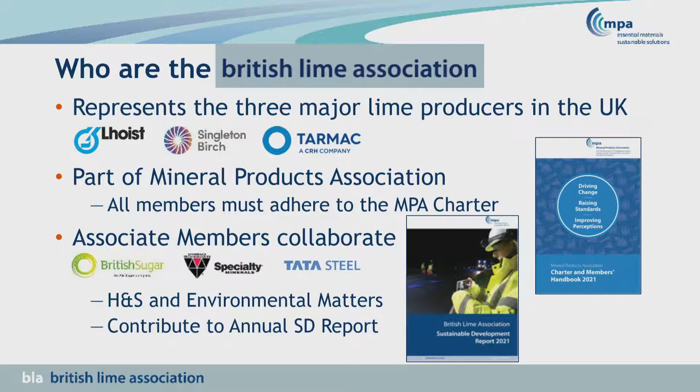So UK lime plants - we all know that Buxton is clearly a big centre for lime production, because that's where the really good calcium carbonate is. But we also have Singleton Birch based over in the Humber area. And then Lhoist have a dolomitic lime production plant at Whitwell in Nottinghamshire. Dolomitic lime is produced in a slightly different way you may not be familiar with - it's produced in a very similar way to cement, going through a rotary kiln at a higher temperature.

And then Tata Steel have their own production facility at Shap Fell, so anybody who goes up and down the M6 regularly will have seen it. As you come over the top of the hill, if you're going up it's on your left, if you're coming down it's on your right - a load of kilns on the side, you'll know it if you've seen it at Shap Fell. Specialty Minerals are at Birmingham, and British Sugar are producing where the sugar beet comes from.

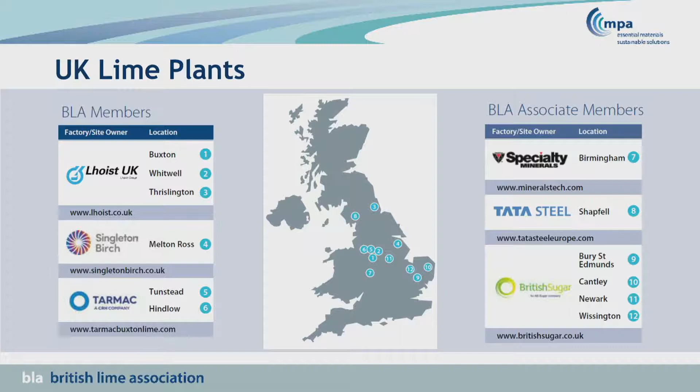So that's manufacturing. Lime is really, really important. All the UK lime producers continued producing lime throughout the COVID pandemic because we have to have lime for societal purposes. It's important because it purifies drinking water, treats your wastewater, cleans up your sewage sludge. It cleans out emissions from combustion plants, energy from waste, and other incineration processes, which clearly there was a lot more of going on during the pandemic.

And it's also used, as I've noted, in primary materials, foods, chemicals, plastics. So maintaining a continuous supply is really, really important for the UK.

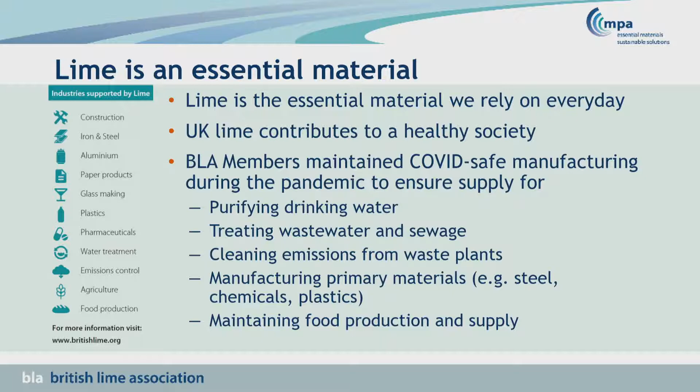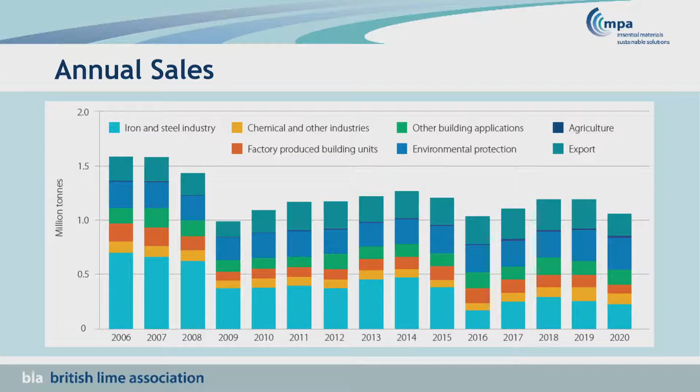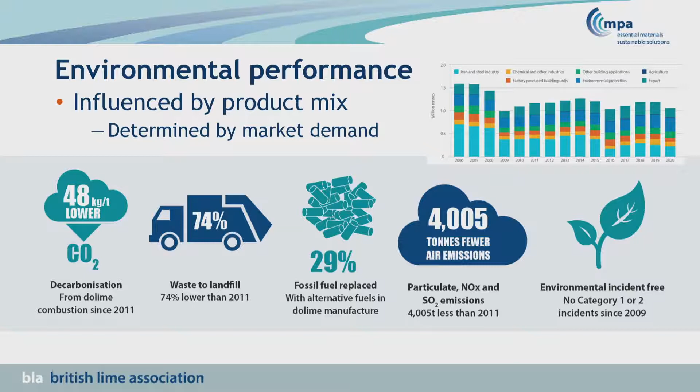In terms of collaboration on health and safety, we collaborate to try and achieve zero harm. I don't think that's a shock to anybody. And we've got some really positive environmental performance. We report on this every year, I'll let you get the SD report.

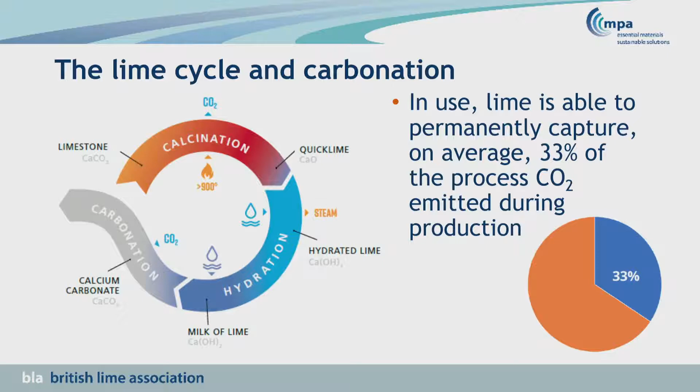This is the note I want you to make a mental note of, David's already mentioned it, I'll come back to this later. Recent studies have shown lime captures that 33% of the process emissions produced to produce lime. When you produce lime, you inevitably drive off carbon dioxide - those are your process emissions. It doesn't matter how you heat it, you're going to get the carbon dioxide driven off. But in use, because we have such a diverse array of uses, 33% of that gets reabsorbed. As soon as you put it in water for water treatment, you get 100% carbonation of that particular product in that particular use. But overall, it's 33% based on the markets the materials go into.

Lime and stabilisation. Basically, there are three mechanisms at work when we stabilise with lime. First is improvement. If you add lime to a moisture-bearing soil, you get this exothermic reaction - lime and water heats up, essentially.

According to my maths, for every kilo of calcium oxide you heat up, you get around enough energy to boil 6 kettles, so that's quite a lot. That heat dries the soil, and it also reduces the moisture because the calcium oxide is combining with the water to make the hydrate. So you're getting two actions going on there to help you dry out your soil.

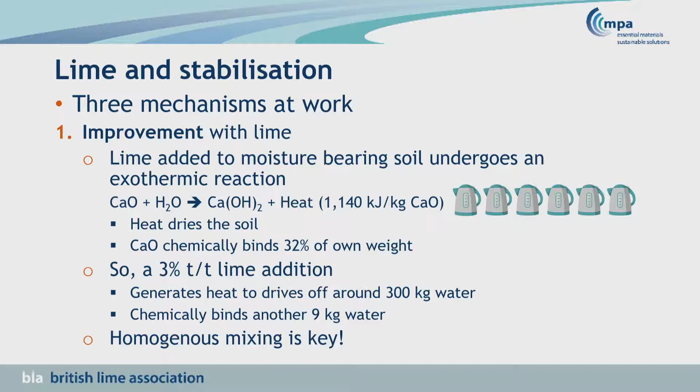I've done some more maths at the bottom. If you add 3% tonne per tonne lime to soil, you generate enough heat to drive off around 300 kilograms of water, and you chemically bind another 9 kilograms. So this is the one thing I'd say - and all the contractors in the room, I hope, would come give me a pat on the back afterwards, because this is what I'm constantly told: mixing is the key to any form of decent stabilisation, modification and improvement.

Modification only happens with clay soils. Basically what happens is you have wet and aligned clay particles, so they slip around - very technical, this. When you add your lime, you disrupt that water layer, disrupt the position, and you get ion exchange of the calcium onto the surfaces, giving less slip and therefore more strength gain in your soils. This is apparently quite rapid - it takes a couple of hours. So you've got a couple of mechanisms going on: drying out, then disruption, which is building up your strength as well.

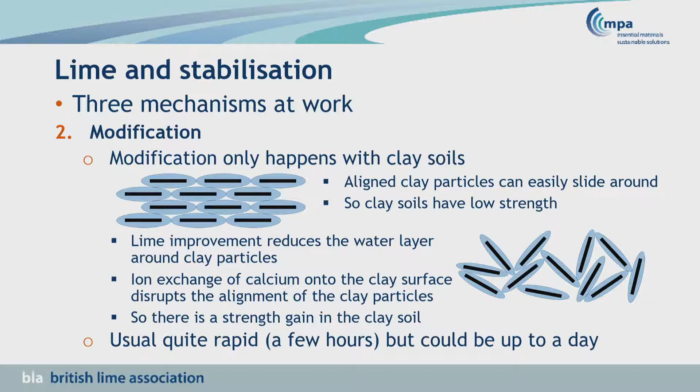The last one is stabilisation - this is the longer term reaction. This is where you get a chemical reaction with the silica and the alumina in the soils, and you get these silicate hydrates and aluminate hydrates being generated, similar to the pozzolanic reactions you'd get with cement. So this is a much longer term reaction taking place over many years.

Now again, this is the note you need to make at the end: there are two pathways. When you add lime to your soil, you can get calcium hydroxide formed, which drives off your water and does other bits and pieces, and then it goes down two routes. It either forms these calcium aluminosilicate hydrates, which is your pozzolanic cementy reaction, or you get the calcium carbonate route. So those are the two paths it takes.

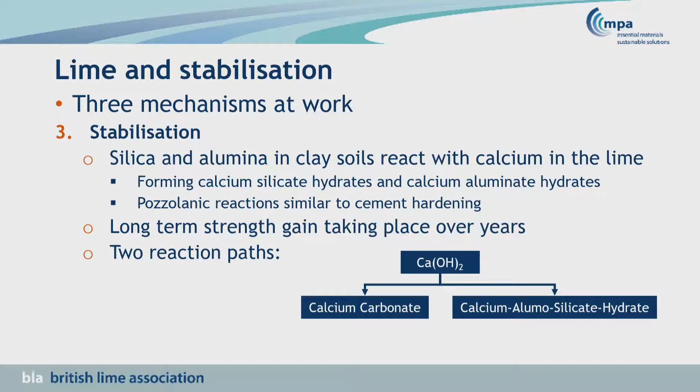That's where I'm going to bring these two things together and talk about lime and the path to net zero. A couple of things going on here. Interestingly, I know the focus has been concrete and all these sorts of things, but stabilisation is inherently a positive, resource-efficient, low-carbon construction methodology because you are using mostly on-site materials.

You're reducing the demand to bring materials onto site, so you're reducing transport and fuel consumption, and reducing traffic congestion around the site, which means fewer delays and lower carbon. By stabilising the sites, you're also able to help sites be worked in wet weather, meaning less lost time, and less stuff coming to site then going away again because it's not being used. It's all about driving down your carbon all the time, and it's therefore delivering timely and cost-effective construction at the same time.

I'm not going to talk about this bit, which is your kind of LCA bit of saying stabilisation is a really great thing to do for all the reasons we all know so well about being cost-effective and time-effective.

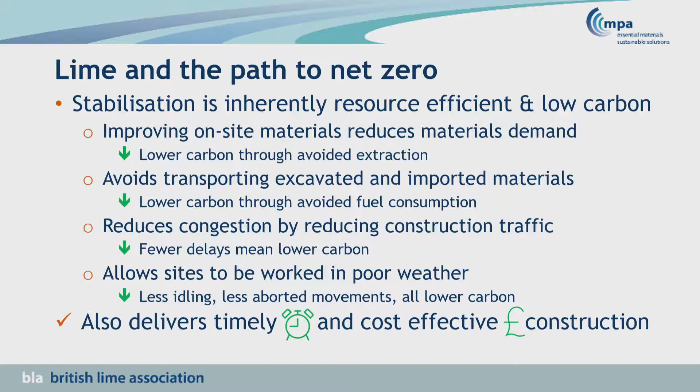Lime, I've got to say, David's already talked about this. Basically, you put chalk and gas into a kiln, you heat it up, and you get lime out with processed CO2 and so on.

We've talked about the split 25-75. So the combustion CO2, we can do something about, we can avoid those—David's talked about those, I won't focus on that. The process CO2 is unavoidable. Whatever we do, that's going to be generated. That's why we need the CCUS. We're actively engaged in looking at that.

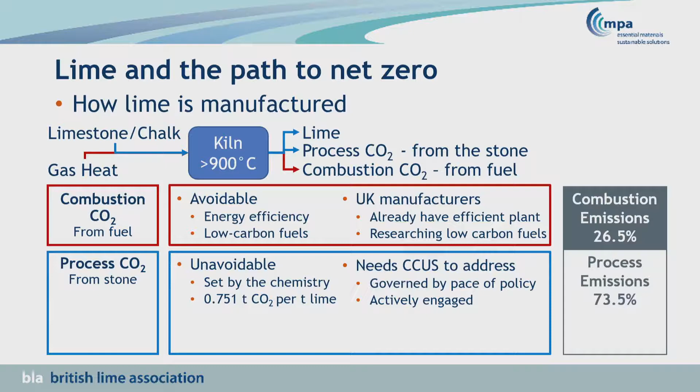If we think about saying we're going to have CCUS, this is going to happen at some point in the future, because we need lime, and if we need lime, we need CCUS. Members are actively taking part—David's talked about the peak cluster he's involved in. Singleton Birch is based in the Humber, there's a massive cluster there. So we're looking at an industry that's probably going to be getting its carbon captured somewhere between 2030 and 2040. We're looking at zero carbon generation at that point, zero carbon manufacturing.

There are three things that were going to lead us to this net zero approach. Zero carbon fuels means zero emissions, okay? Carbon capture means zero emissions. So once we get those two bricks in place, carbonation—which is the atmospheric absorption of CO2 from the air—carbonation then makes us net negative, okay?

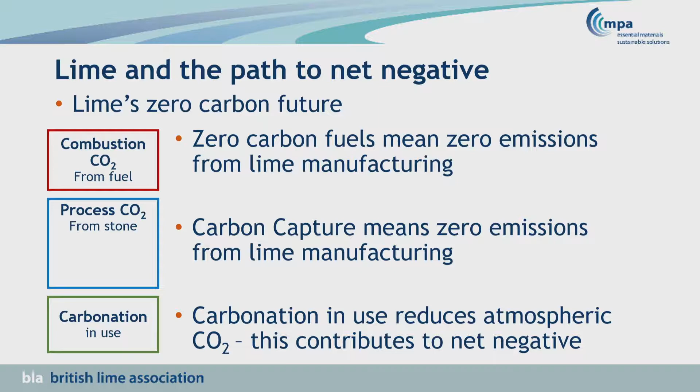So carbonation is a naturally occurring thing. If you leave lime outside, it will carbonate. That is the way of it. That's why we have to heat the limestone up to drive the carbon dioxide off, because it naturally wants to revert to calcium carbonate. And what that means is that it's also thermodynamically stable. So once you've recarbonated it, it's not like you're putting it in your fizzy pop, you take the lid off and the carbon dioxide goes back out again. That's it—unless you're going to heat it up again to 1,000 degrees C, you've got calcium carbonate being formed.

That's how air limes work, that's what they do, that's the process. They are not hydraulic materials, they are not cement. Unless you're using them in a clay soil, air limes in mortars and things like that work by converting into calcium carbonate.

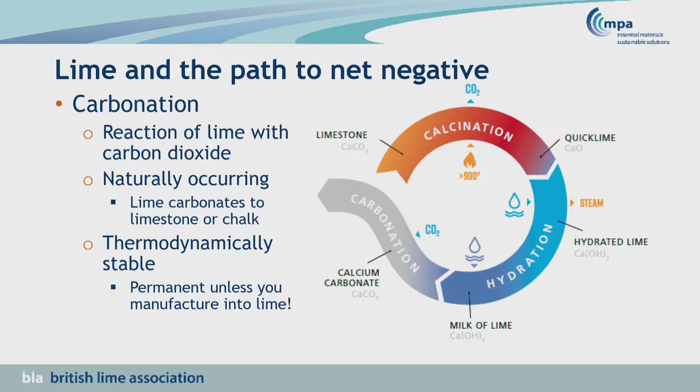So the work by EULA, European Lime Association, shows that in 8 conclusive uses—where there is a lot of documentary evidence—you'd get at least 23% recarbonation. But there's another 10% which is likely to come from other uses as well, including stabilisation. So what this says is there is very solid evidence that we can hang our hat on that says it's absolutely, definitely 23%. And then there's evidence, but only maybe 10 papers rather than 50 papers, that say you're probably going to get another 10%. And then there's a whole load of other stuff where there are no papers at all. So we're pretty confident that you're going to get 33%.

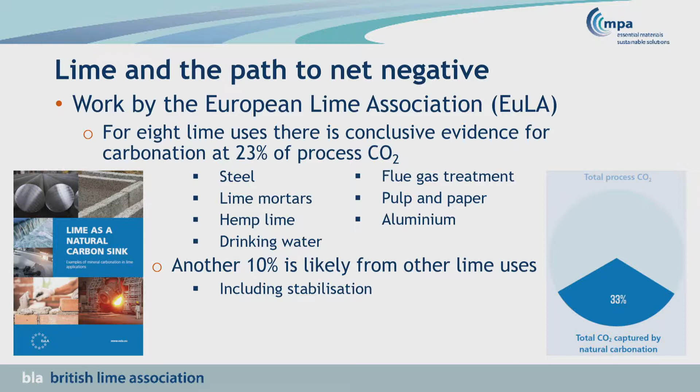So there was a case study in terms of stabilisation. There is this one key piece of evidence, a case study from Germany. It's one of these great projects where the stabilisation was done, and whoever was doing it at the time, it was new and innovative, and they took loads of measurements all over it—loads of data, loads of historical data. Fortunately, somebody kept all of that.

They had this embankment constructed in 1979, and they added quicklime for improvement and stabilisation. I'm not going to go into the details, but essentially they went back and sampled it again in 1990, and they noted the increase in compressive strength. The 1990 study was all about how much stronger it has got, how much it has reacted. They then went back again in 2013, so at that time it's now 34 years old. Those compressive strengths had gone up to between 3.8 and 6 megapascals—a significant strength increase over time, which you'd expect.

But what was important about the 2013 study was that they noted that—remember the 2 pathways?—47% of the calcium oxide had gone through to the pozzolanic reactions, and the other 37% had been carbonated, calcium carbonate. And then you've got 16% that's still in there after 34 years as free lime.

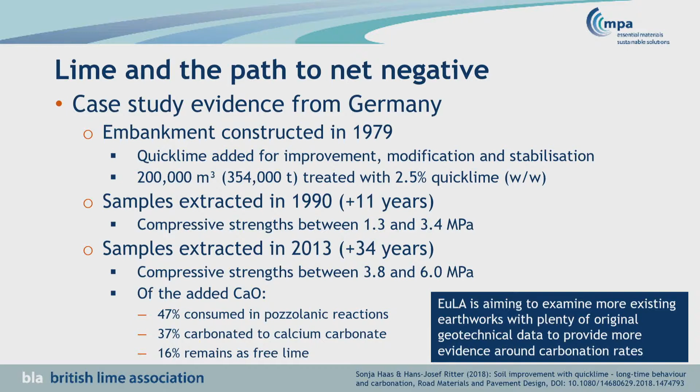So what EuLA are doing is one key study. They're looking for other studies at the moment where you've got a really good baseline of data, and they can go back and start extracting more information and trying to build a better picture about carbonation rates in stabilised soils.

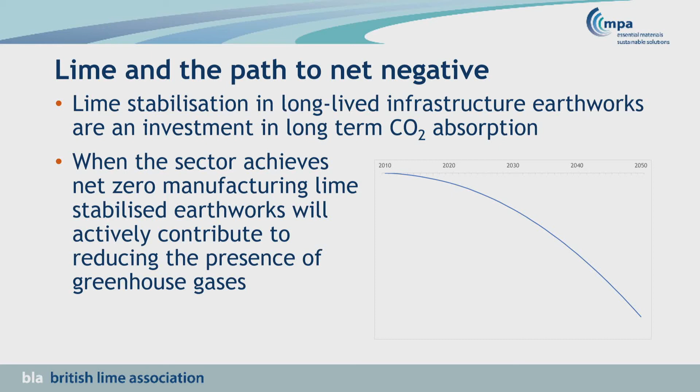So basically, what that tells us is that if you are stabilising with lime in long-lived infrastructure—which is mostly what you're using lime stabilisation for—you're actually investing in long-term CO2 absorption, because that's what's happening. It will be carbonating, that's just the way life is. When the sector achieves net zero manufacturing, every time you use lime in a long-lived infrastructure asset, you are investing in a contribution to achieving the UK achieving net zero by 2050. That's what it means, essentially. We need to achieve, no doubt, net zero manufacturing, and there's no doubt that we will achieve net zero manufacturing, but that means every time you use lime and you get recarbonation, you're actually capturing and extracting CO2 from the atmosphere, which has got to be a good thing.